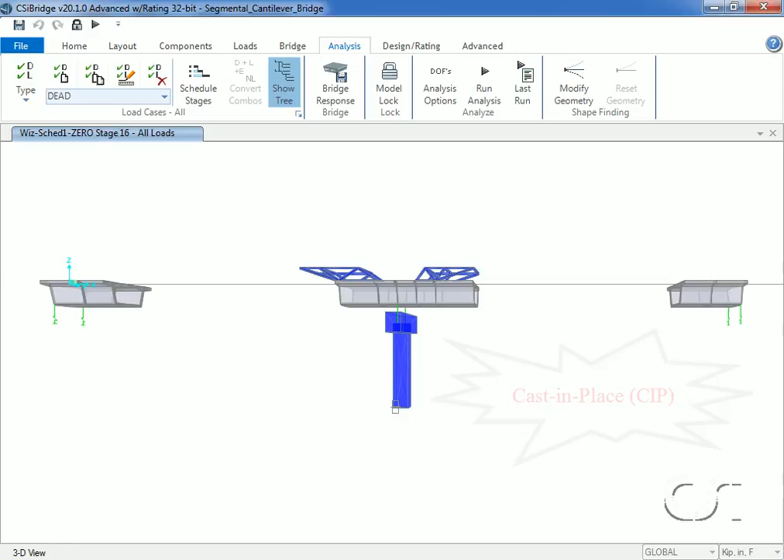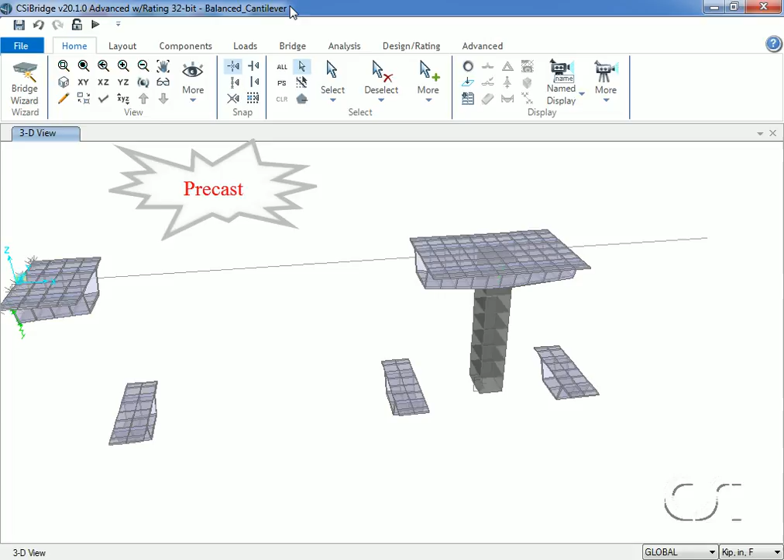The use of the segmental bridge template allows for modeling of bridges using cast-in-place segments, or precast segments. Our tutorial will create a balanced cantilever cast-in-place bridge.

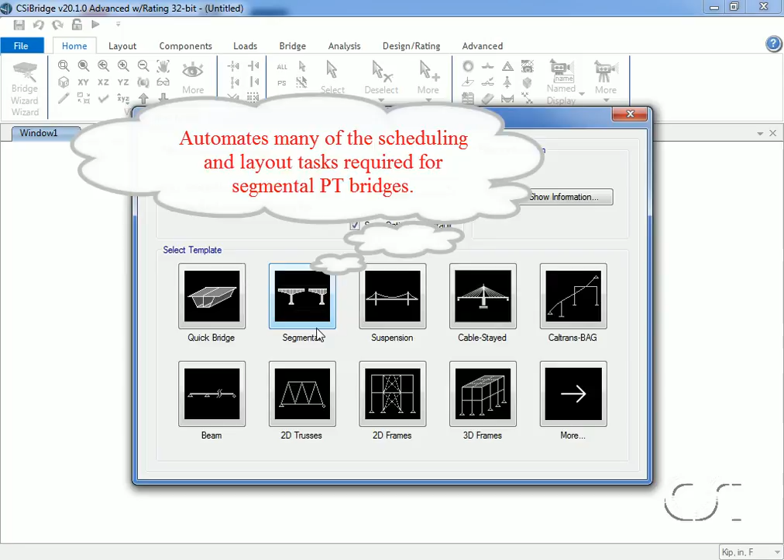We will now start our model. On the new model form, we will use the segmental template. This template can significantly reduce the time needed to model segmental post-tension bridges. The quick segmental bridge template form is where the layout line length is specified, as well as basic bridge properties.

Our bridge will have a total layout line of 200 feet or 2,400 inches. Our actual bridge will be 160 feet long and will be cantilevered off a single pier. We have a number of choices for the bridge section type, and we will use the AASHTO PCI ASBI standard section. Clicking the Modify Show button, we can review the specific properties of this deck section.

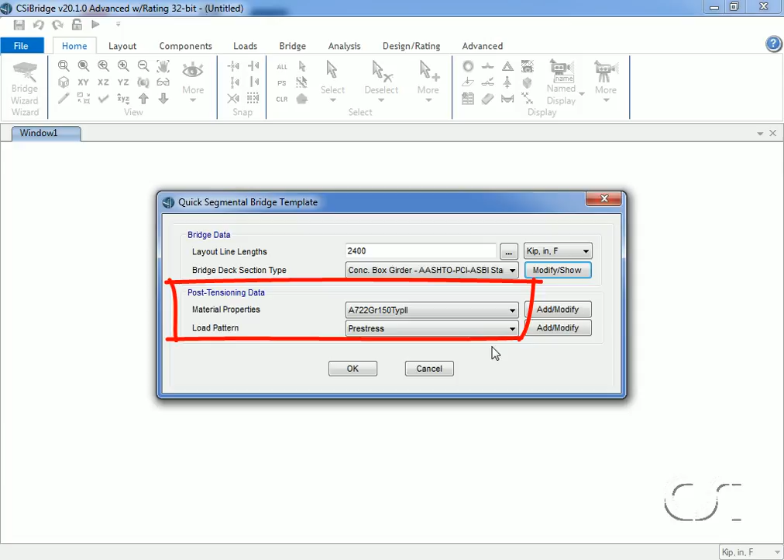If some modification is required, we could click the Convert to Editable Section button, which would then allow for property edits. The last items on the form are used to specify the post-tensioning material and load pattern. We will leave as is for the time being.

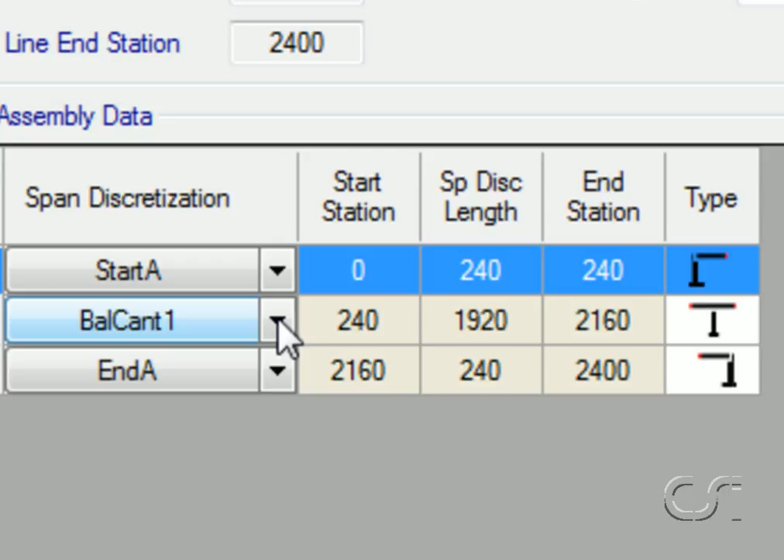On the segmental bridge span assembly form, we have three discretizations. The first is the span at the start abutment. The second is the balanced cantilever span. And the last is the span at the end abutment. Although we are doing a balanced cantilever with a single pier, we could also do span-by-span construction.

And if so desired, we could add additional discretizations using the various Add and Insert buttons. We will use the three discretizations as shown. The start and end abutment segments are each 20 feet or 240 inches long, and we will not alter these. However, we are going to modify the length of the balanced cantilever segment. Currently, the bridge has a total length of 200 feet, and we will shorten it by 40 feet, 20 feet off each span. We do this by clicking on the Span Discretization Plus button.

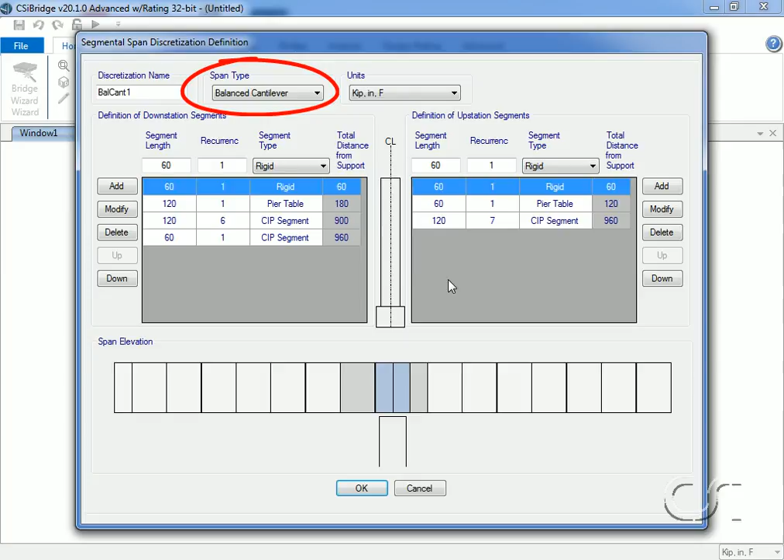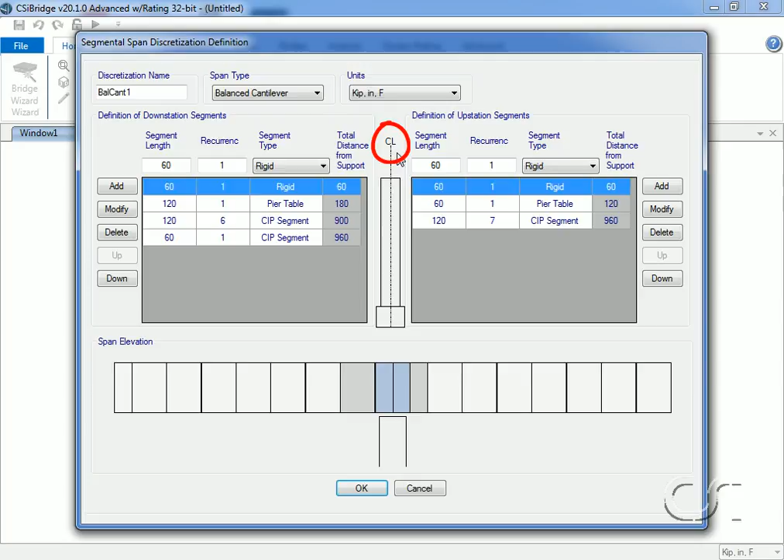On the Segmental Span Discretization Definitions form, highlight the Balanced Cantilever 1 segment and click the Modify Show button. On the form, verify that the span type is set to balanced cantilever. The downstation table is on the left, and the segments upstation from the pier are shown on the right. Starting from the pier centerline, each side has a rigid segment 60 inches long.

Next are the pier tables, 120 inches on the left and 60 inches on the right. We are going to make them symmetric, so we'll modify the table on the left to 60. Next are CIP or cast-in-place segments, 6 at 120 inches on the left and 7 at 120 inches on the right, followed by one last 60-inch CIP segment on the left. We are doing a cast-in-place model, but could also do a precast segmental model.

We are going to remove CIP segments from each side, and again we'll make them symmetric. On the left, change the 6 to a 5, and click Modify. On the right, change the 7 to a 5, and click Modify. We will delete the last shorter CIP segment on the left. The length of the balanced cantilevers on each side is now 720 inches. We are now done with this form.

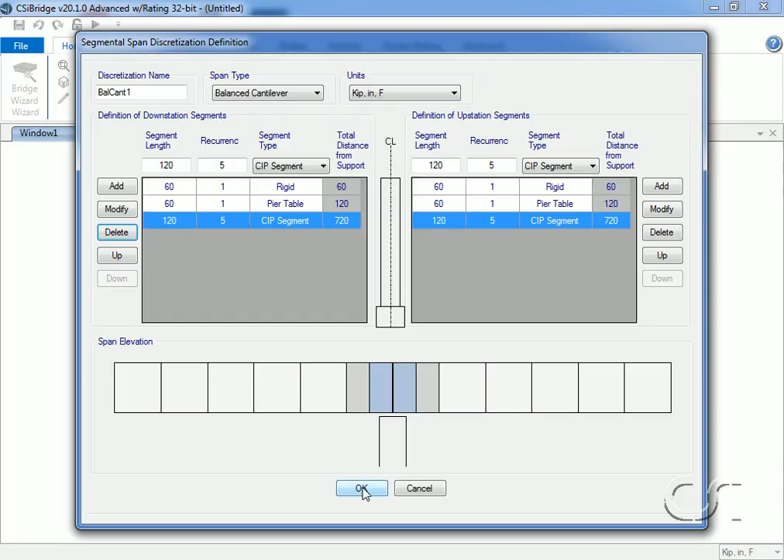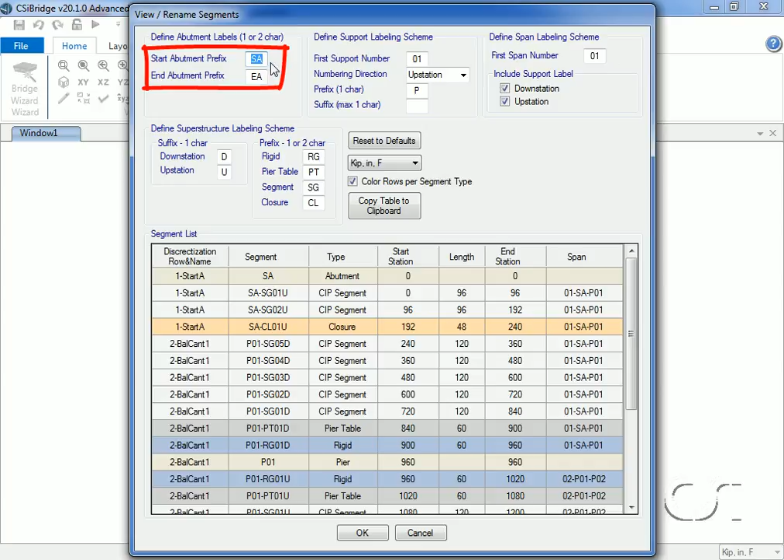Note that the total bridge length is now 1,920 inches or 160 feet. Clicking the View/Rename Segments button shows all of the segments that make up the bridge. The nomenclature used throughout the table is shown on the form. For example, SA and EA for start and end abutments, D and U for down and up stations, and the various prefixes. The user may alter these if so desired.

In this area of the form, we can set the support labeling. Perhaps rather than starting with 1, we start with 5 and go in the downstation direction. See how the labels change. We can also specify the span numbering, but we will use the defaults in this model.

The segments can be identified by color, which the user can switch on and off if desired. On the table, the first segments deal with the start abutment, denoted by SA. There are 2 cast-in-place segments and 1 closure strip.

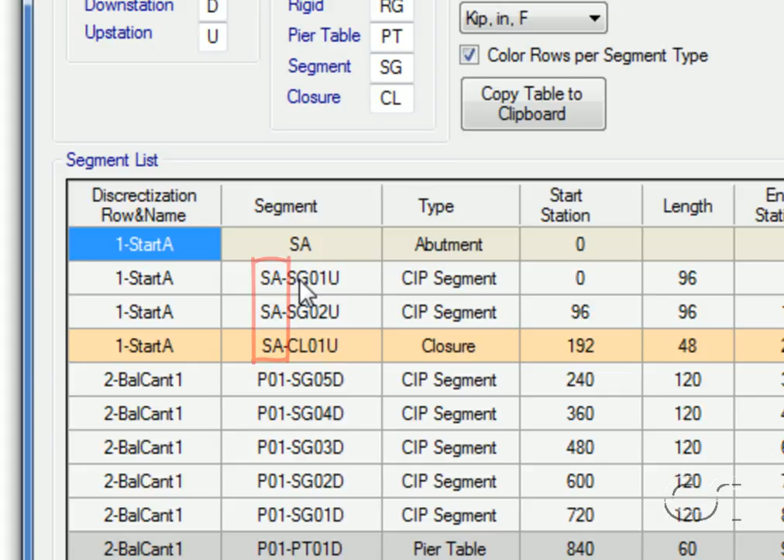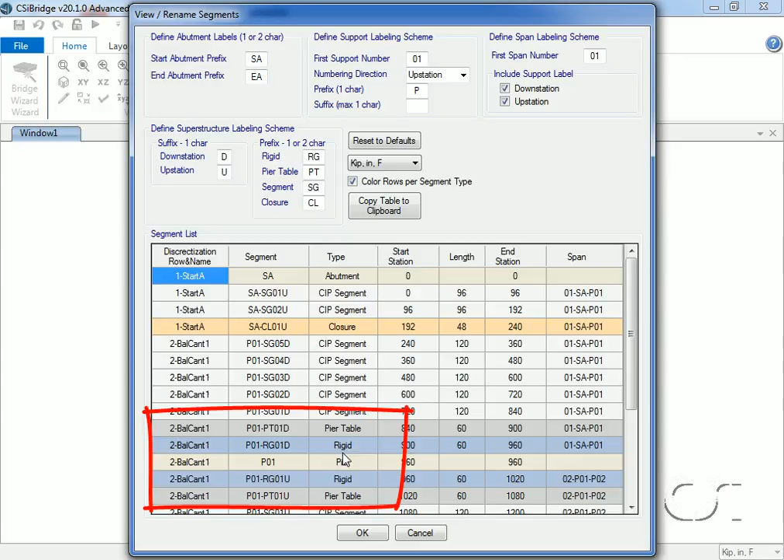The next group of segments define the downstation balanced cantilevered segments from the pier, a total of 5 segments. The next 5 segments deal with the pier: 2 pier tables, one at the downstation side and one at the upstation side, 2 rigid segments, and the pier itself.

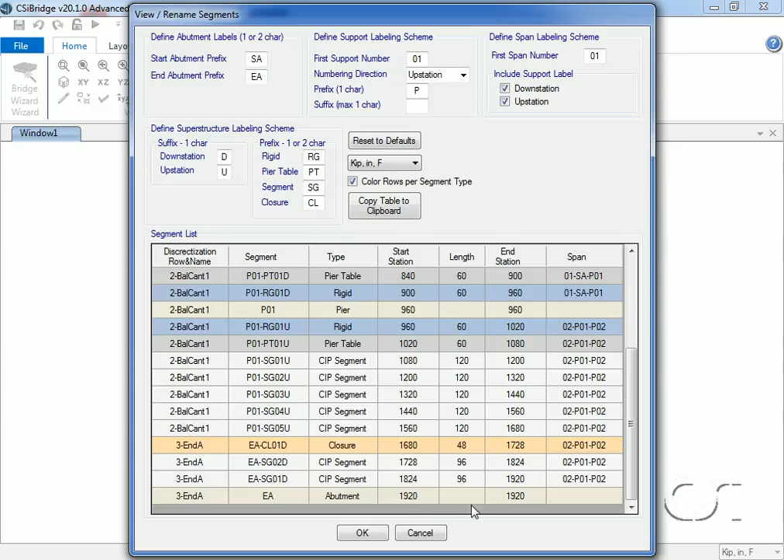The next 5 segments define the upstation balanced cantilever segments. The last segments define the segments associated with the end abutment as identified by the EA prefix, and again include a closure strip. Once we are satisfied with the segment definitions and verify that the total length is correct, 1,920 inches or 160 feet, we can click OK.

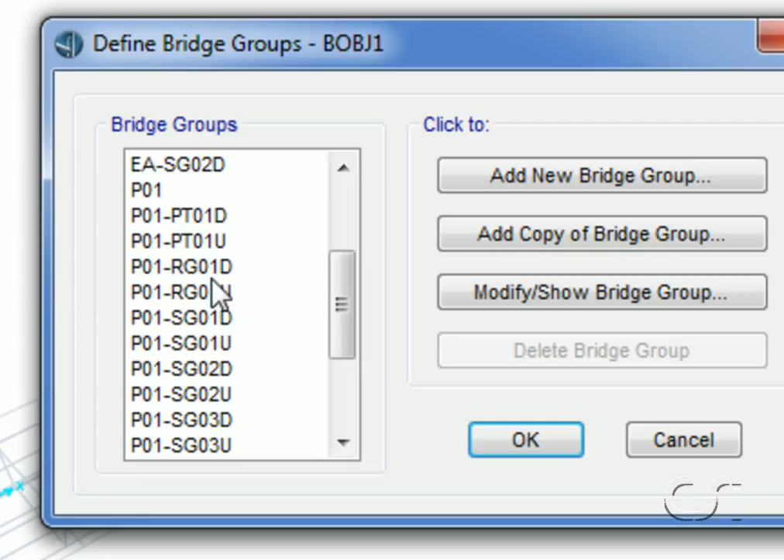The bridge deck is now displayed. Based on the discretizations we've just defined, the program has automatically generated groups, which will be used in the erection sequencing. We can review these groups by going to the Bridge tab and clicking Groups. Looking at the groups, we can see the correlation with the segment names in the previous table, such as PT for the pier table, RG for the rigid segments, and SG for the cast-in-place segments.

Highlighting P01 SG01D and clicking Modify, this is the first segment downstation, which has a length of 10 feet and ends at the pier table at station 840.

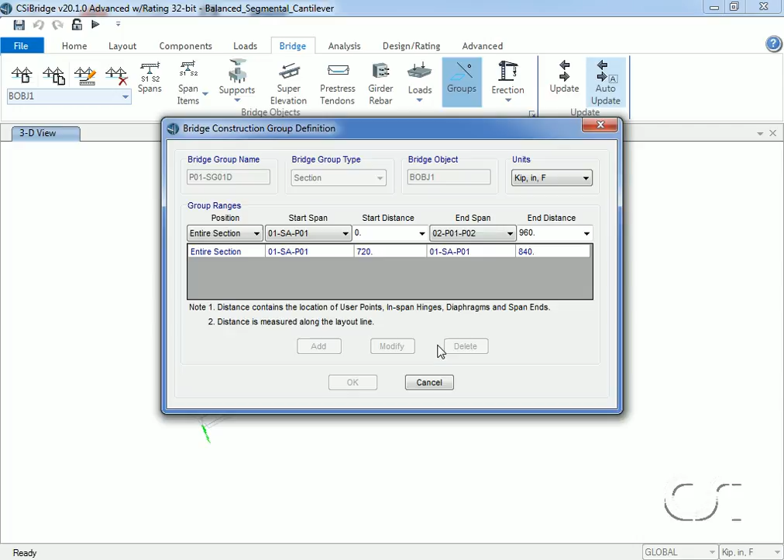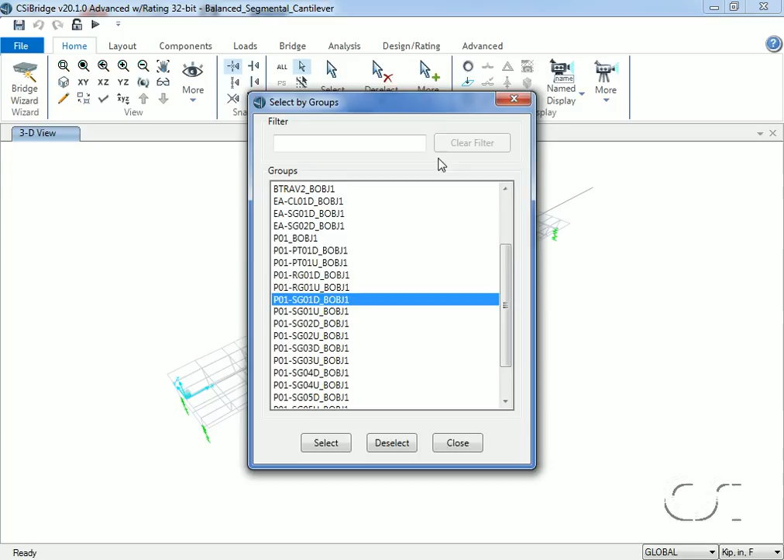Switching to the Home tab, we will take a quick look at how the groups are assembled to create the bridge. Using the Select by Groups option, we will select the same P01-SG01D group. We see that it is just downstation of the pier. If we select the next group, we see that it is just upstation, and so on. If we move to the end of the selection list, we can see the groups that are used at the start abutment.

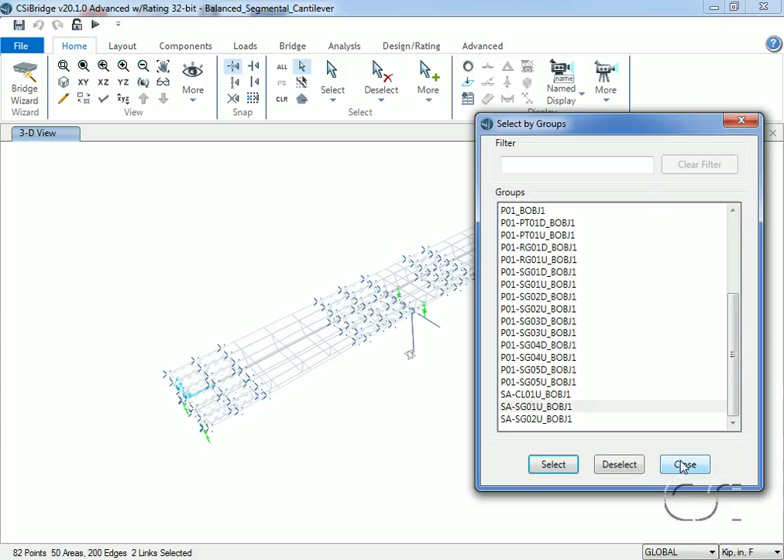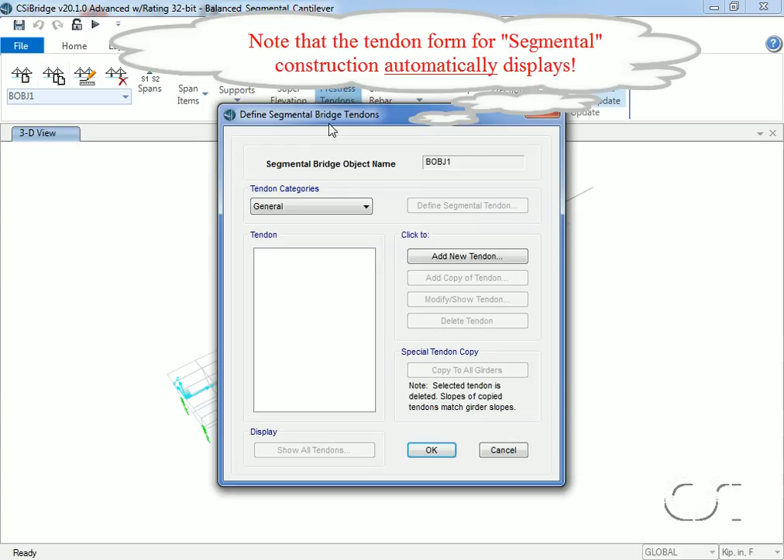The next step will be to define the post-tensioning tendons for use in the model. On the Bridge tab, click the Pre-Stressed Tendons button. On the Define Segmental Bridge Tendons form, select Segmental Cantilever from the Categories drop-down list. We will start by defining the cantilever tendons, and then click the Define Segmental Tendon button.

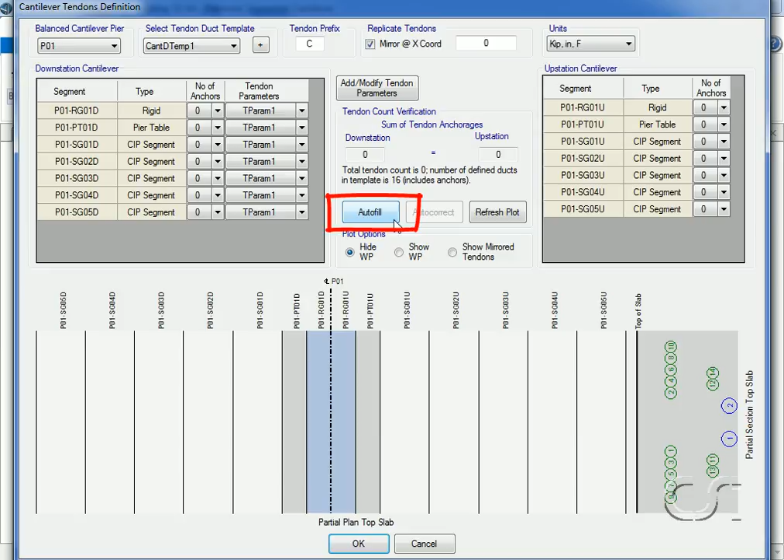Here we are going to use the autofill option, and will mirror the tendons about the center line of the deck. This powerful feature will automatically generate the layout of the tendons for each segment. Clicking autofill, note that we now have a total of 12 tendons, with 2 anchorages for each segment and pier table in both the downstation and upstation locations.

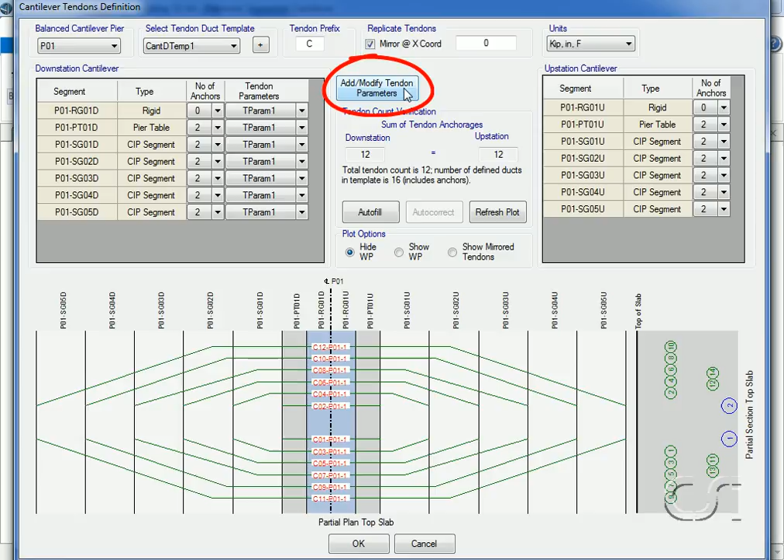A reference plan for the top slab is shown. If we select the Show Mirrored Tendons option, we can see the layout to each side of the center line. And we can also see the work point. To adjust the tendon parameters, click the Add Modify button. Note that we currently have only a single tendon parameter, T-param1.

Here we can review and edit parameters as needed, including tendon area and the loss parameters, such as those due to friction and the long-term losses. We will set the load pattern to pre-stress, and we are going to change the material property. We will add a property of A416 grade 270.

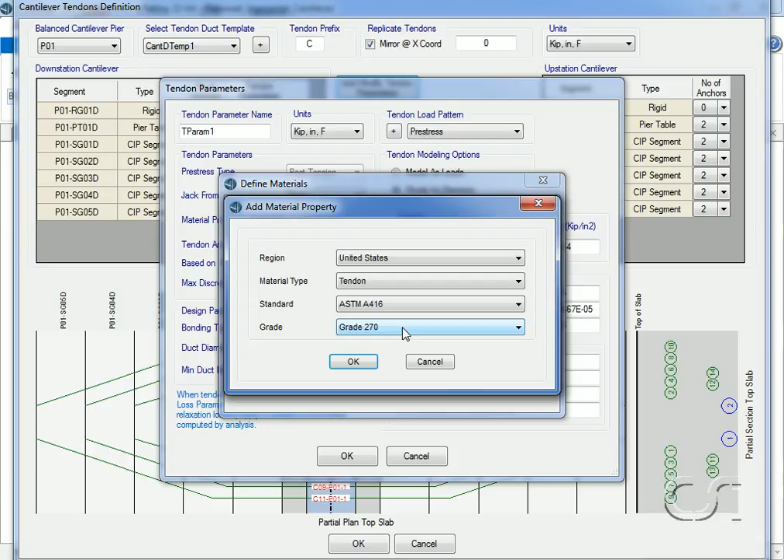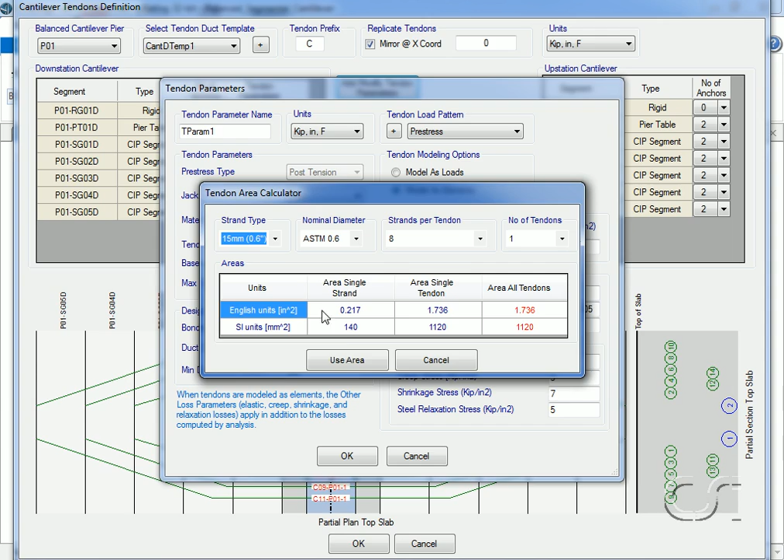We are also going to revise the tendon area based on a quick and somewhat approximate calculation. We are going to use a tendon with 8 strands of 0.6 inch diameter. We will also revise the duct diameter to 2.99 inches, and the tendon load to a stress of 202.5 KSI. We leave all other parameters as shown.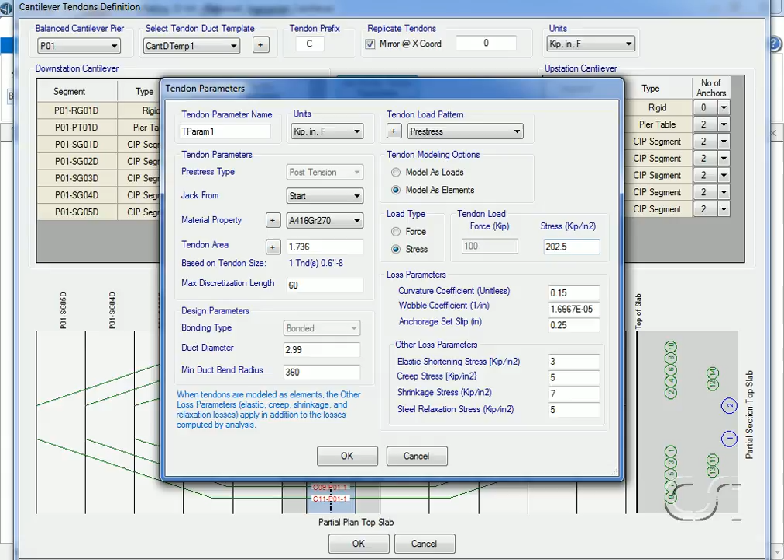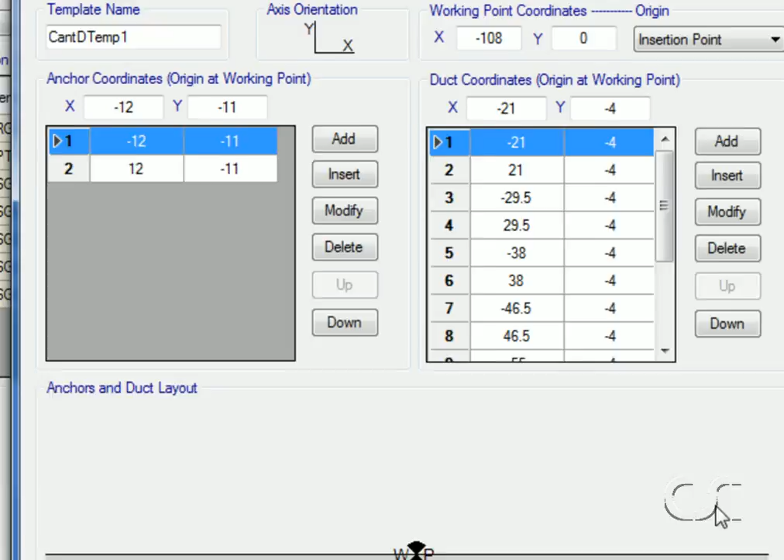While still on the cantilever tendons definition form, we can click the Select Tendon Duct Template button to review the layout of the ducts. Returning to the Define Segmental Bridge Tendons form, note that there are now a total of 24 tendons, 12 distributed to each side of the center line. Show all tendons again shows the plan layout, and scrolling through the cross section shows how they are clustered around the webs.

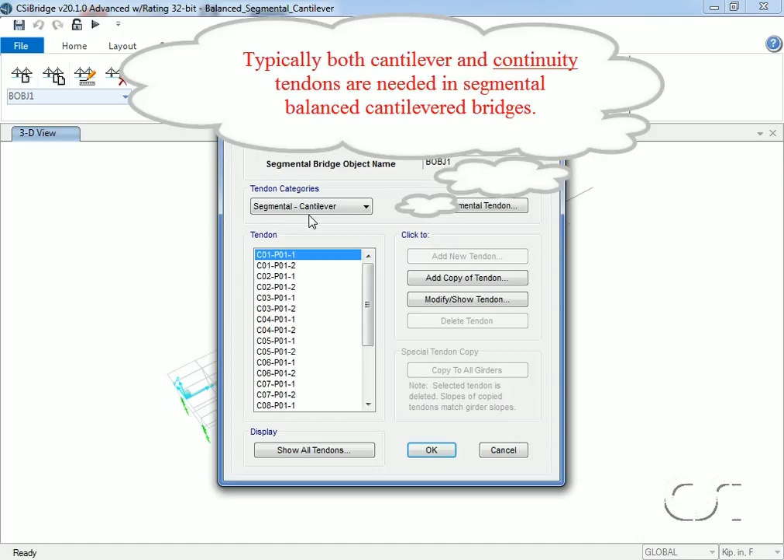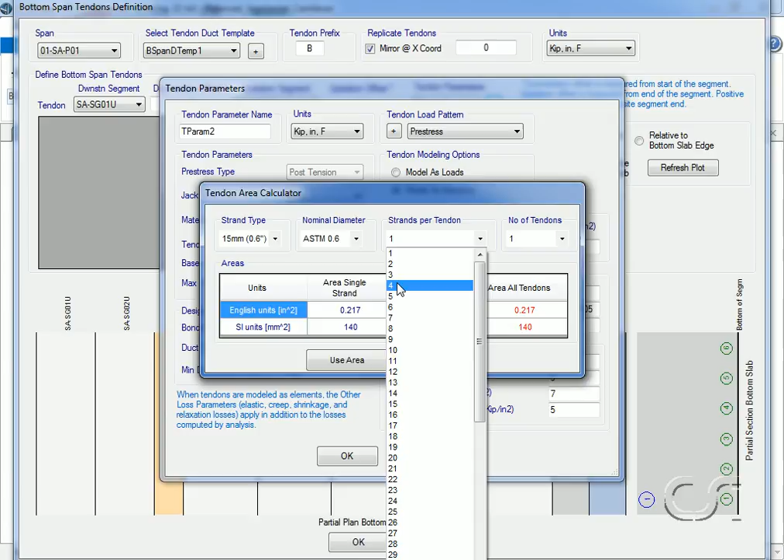However, these are just the cantilever tendons. Typically, continuity tendons are needed as well. So next, we will add some additional continuity tendons for placement in the bottom span. We will define a new tendon by making a copy of our first tendon, TParam1. Our new tendon will use 4 0.6-inch strands. Again, all the tendon selections are somewhat arbitrary at this point, simply to show the process. They have not been determined from strength requirements.

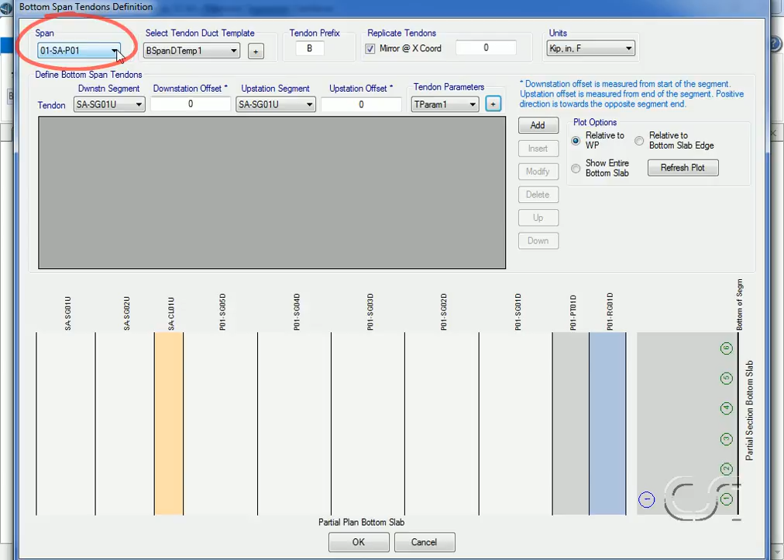With the first span selected, we are going to add a tendon that runs from the start abutment segment all the way to the pier table using our new tendon. Again, we are replicating about the center line. We will add a second tendon that starts and ends one segment shorter on each end. Switching to span 2, we will replicate the tendons just added on the upstation side.

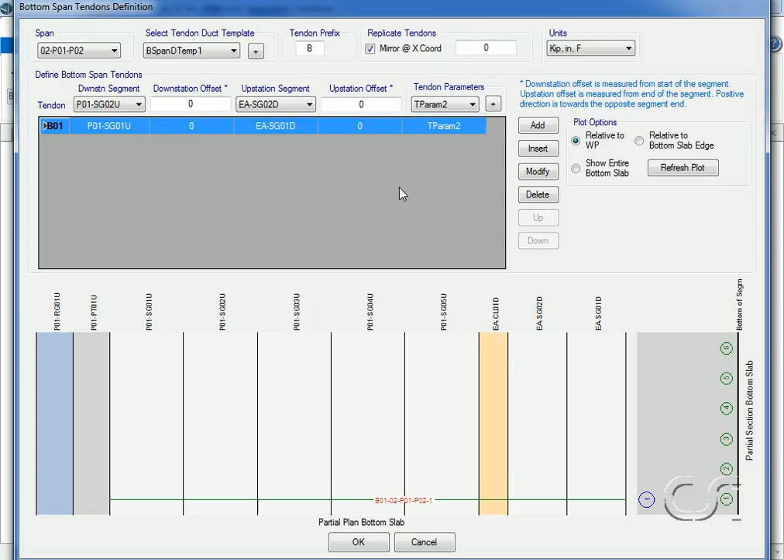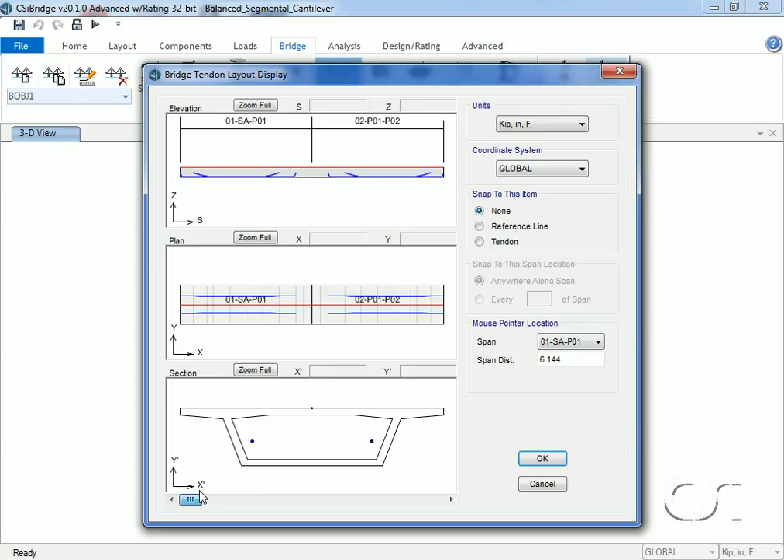Again, the tendons are added symmetrically. Closing this form, note that 8 tendons have now been defined for the bottom span. Clicking the Show All Tendons shows the location of these continuity tendons. We could also add continuity tendons for the top if needed.

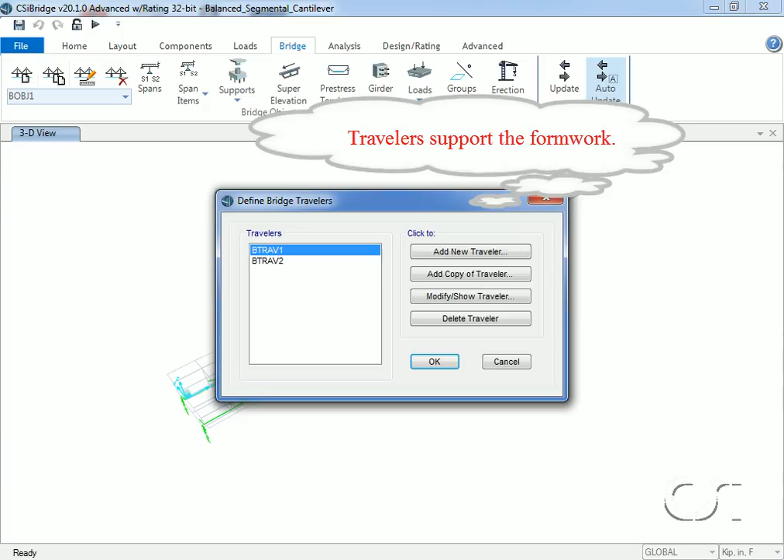The model now has tendons. Next, we will move on to the scheduling. On the Bridge tab, go to the Erection button and click Traveler. Travelers are needed to support formwork for cast-in-place concrete. Note that two travelers have been defined, one for downstation and one for upstation.

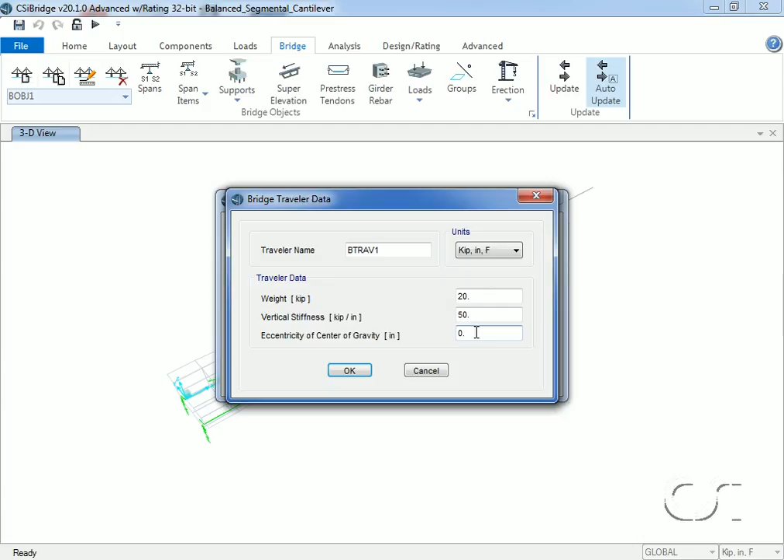To see the properties of the traveler, click the Modify button. The traveler weighs 20 kips and has a stiffness of 50 kips per inch. This means it will deflect 1 inch for each 50 kips of load. The eccentricity defines where the center of gravity of the traveler lies relative to the end of the supporting segment in the longitudinal direction. Positive is away from the free end. We will not alter these values.

Next, we will click on the Schedule wizard. Here we can set the time required for each stage in the construction schedule, from constructing the foundation and pier to the time required to cast and stress a segment and then launch the traveler, which in our case is 4 days. We will not change any of the duration settings.

We can also specify how the segments are to be erected, one by one or in pairs. We will erect the segments in pairs. On this form, we can also set which traveler is downstation and upstation, and specify any additional structure loads, such as wearing surfaces and barriers. Click the Generate Schedule button to generate a detailed construction schedule.

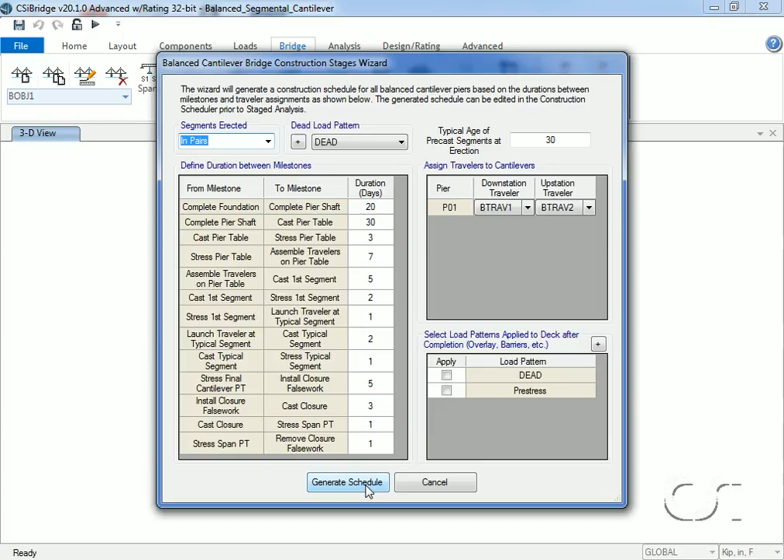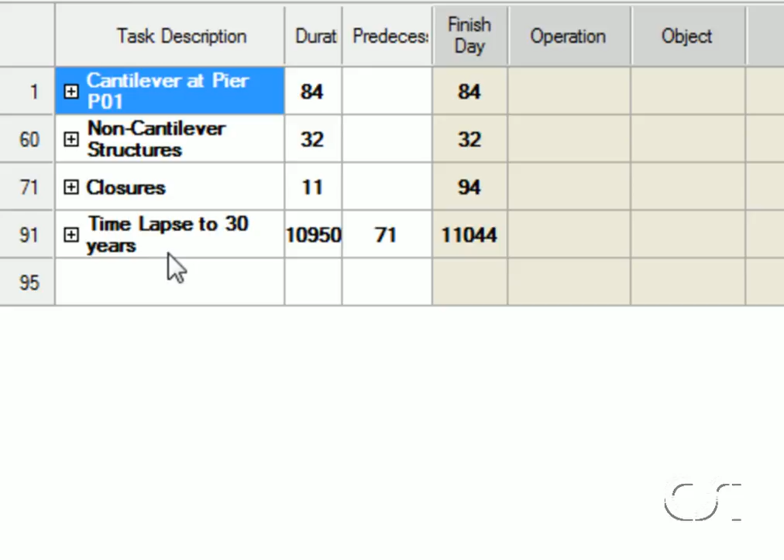The schedule is broken down into 4 primary operations. First, the cantilevered portion of the bridge at the pier. Second, the non-cantilevered structure, that is, the end abutments. Third, the closure segments. And fourth, the time-lapse analyses. Each operation shown in the table is also graphed in the adjacent Gantt chart.

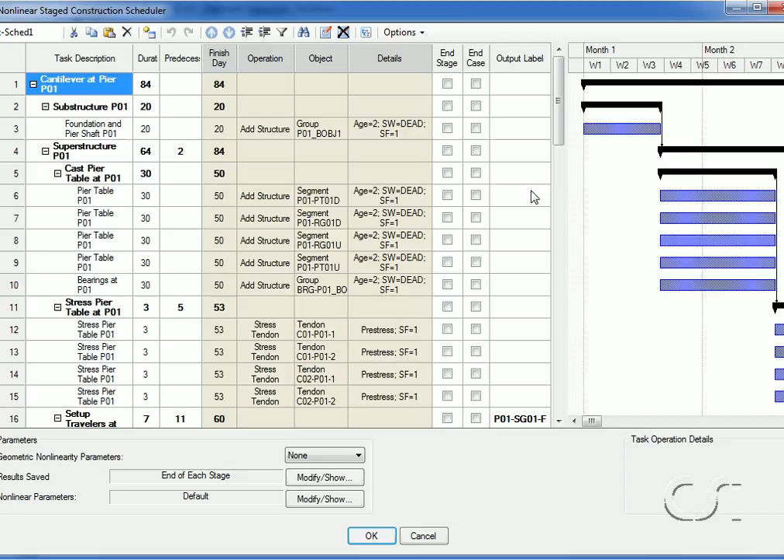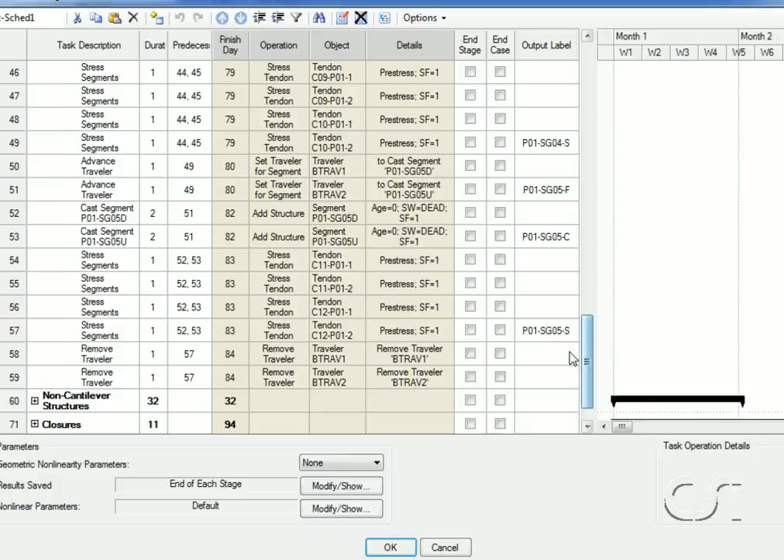Expanding the operations, the schedule starts with the foundation and the pier, then the pier table, then adds the travelers, then starts the casting of the segments. Note that the typical cycle is again 4 days, 80 to 83 on the schedule, and that 4 tendons are tensioned in each cycle. The travelers are advanced, the segments are cast, and all 4 tendons are stressed.

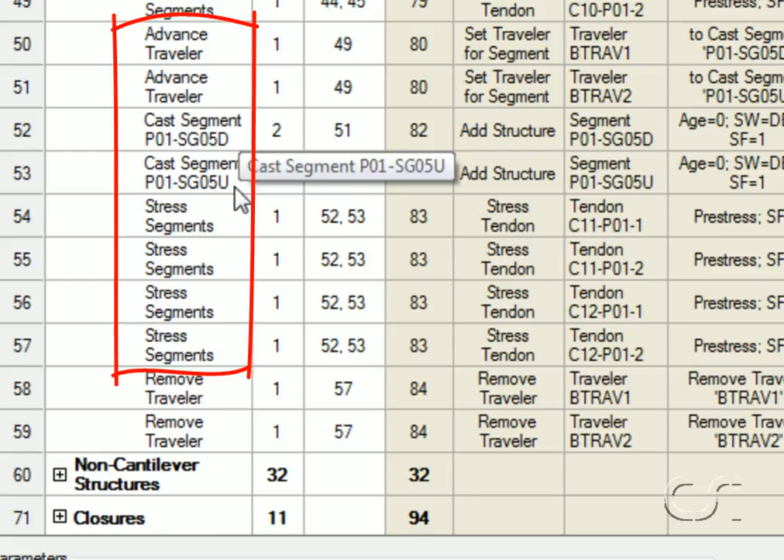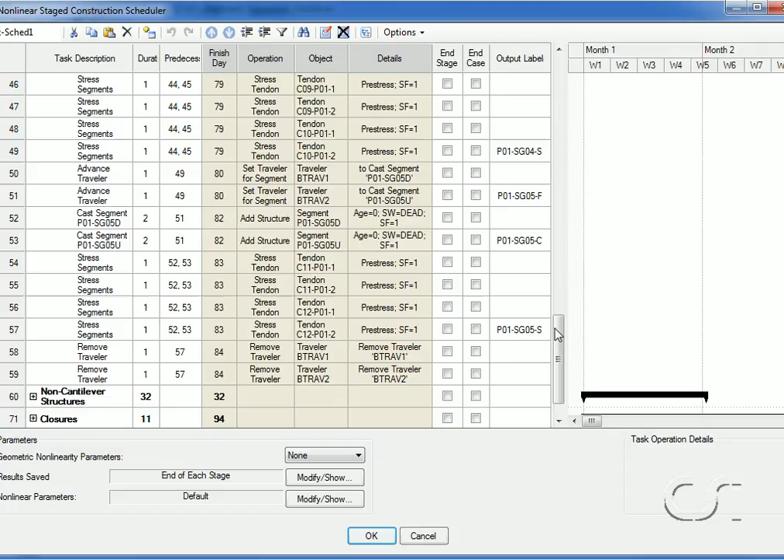As a side note, although we have not adjusted any of the program-generated durations, these may be edited, and all operations that are descendants of the edited operation would have their timing adjusted accordingly. The construction of the start and end abutments occurs early in the schedule, while the closures are constructed late in the schedule. The last tendons being stressed are the continuity tendons in the bottom slab. Once we are satisfied with our detailed schedule, we can click OK to save it.

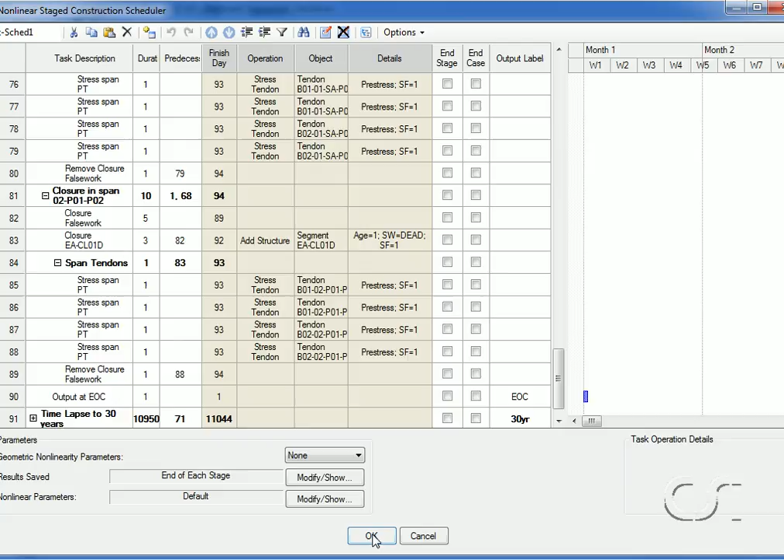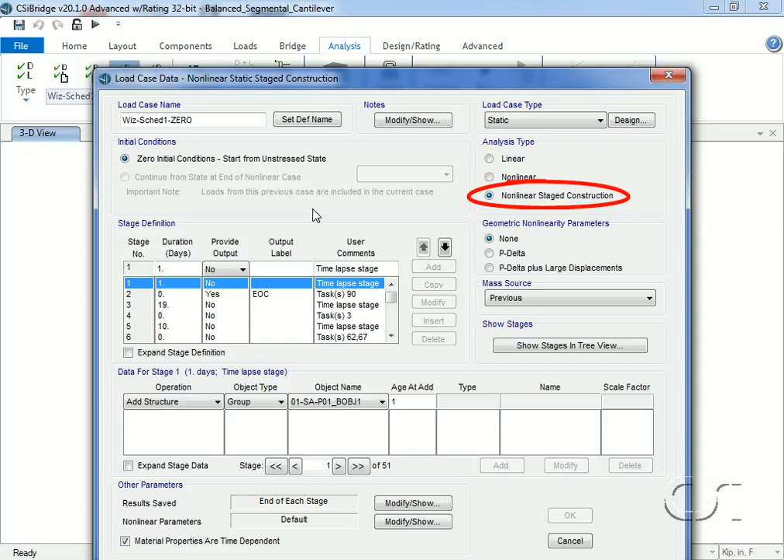We will next move on to showing how the program takes the scheduling information and generates the load cases needed to perform the analysis. On the Analysis tab, select the Wizard Scheduled Load Case and click the Modify button. From the scheduler, the program has created a nonlinear staged construction load case with a total of 51 stages.

Again, the typical cycle is that the travelers are set, a 2-day time-lapse stage while the segments are placed. The next stage adds the segments and loads them. Another time-lapse stage for the tensioning, and the tendons are added and loaded. Changes cannot be made to this load case because it was generated directly from the schedule wizard.

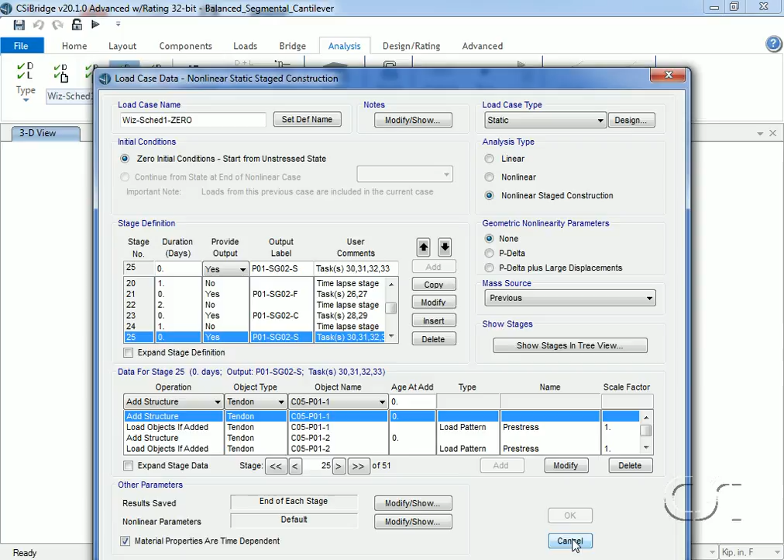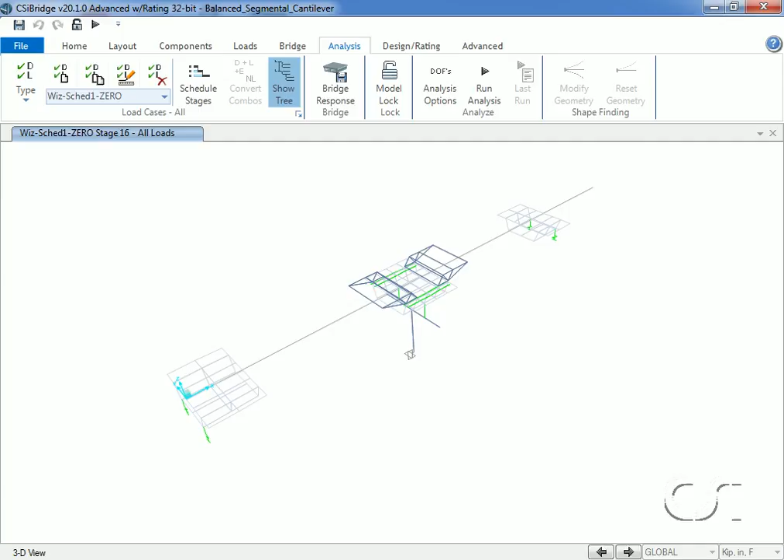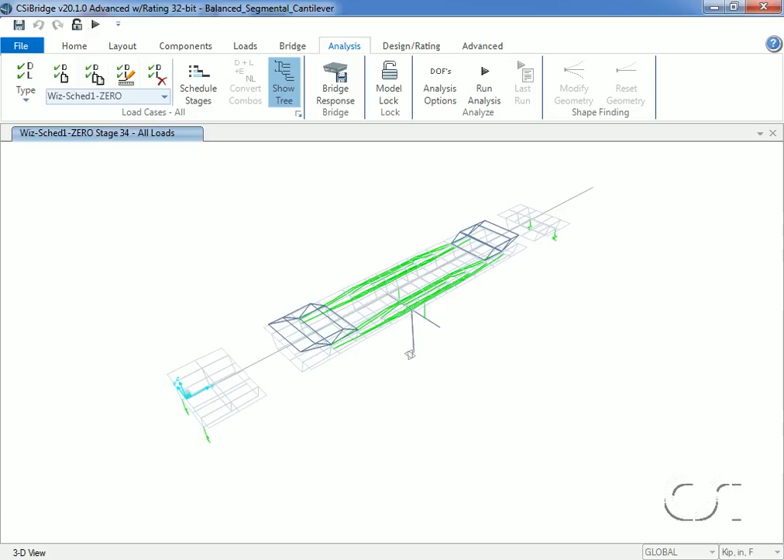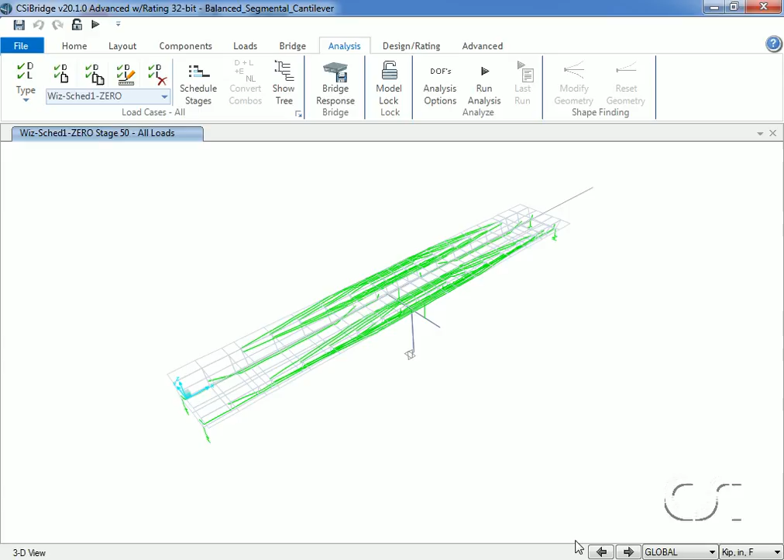As a last step prior to running the analysis, we will look at the erection sequencing of the segmental bridge, which can be done using the Show Tree button. Here we can see segments being cast and then post-tensioned, as well as seeing how the travelers move. With that, we are now ready to run the analysis.

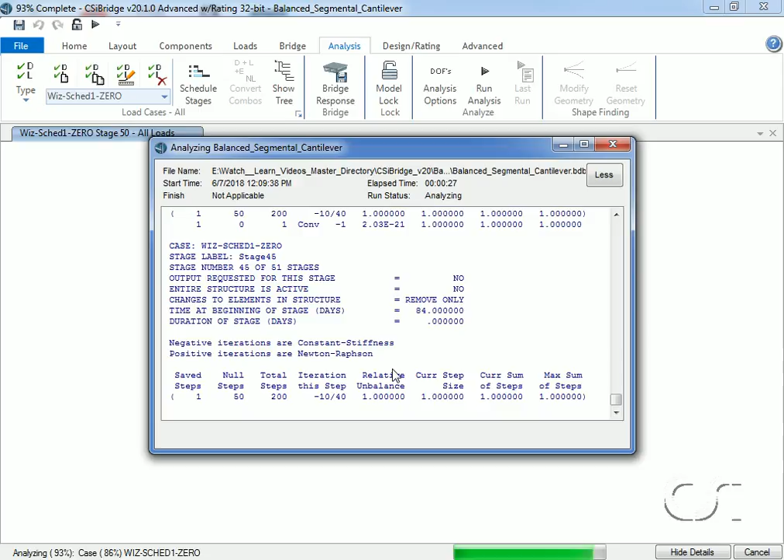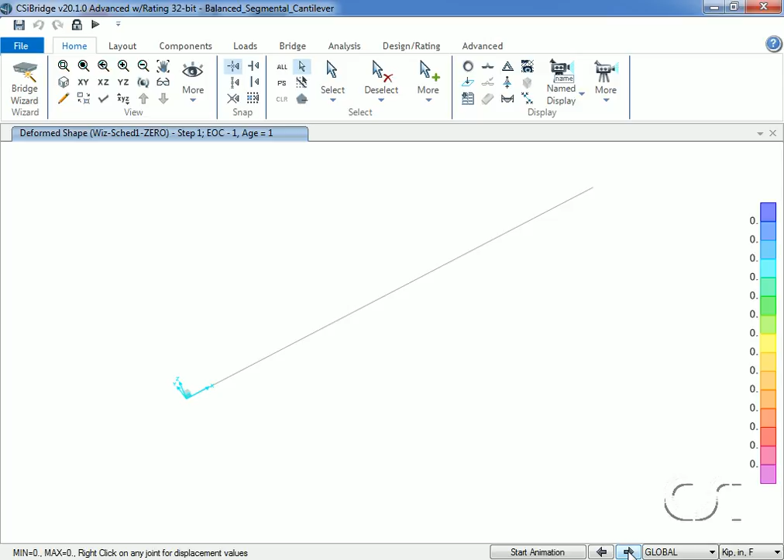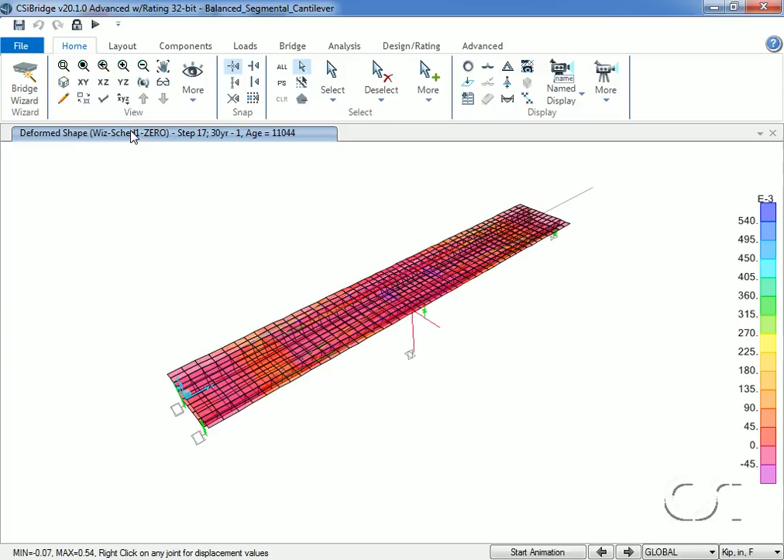With the analysis complete, we can display the deformed shape for our stage construction case. We can step through each stage. Note that the travelers are shown with straight lines. We will also display the force diagram for our stage construction case, this time using the F11 component.